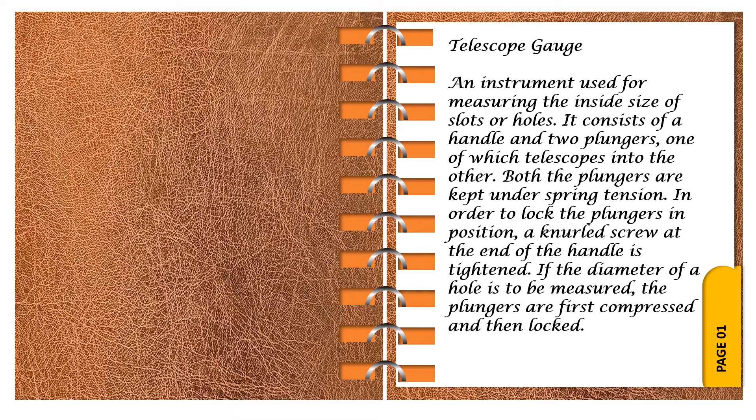If the diameter of a hole is to be measured, the plungers are first compressed and then locked. Measuring technique: compress the fixed and telescopic legs and lock them by the locking screw. Insert the gauge ends into the hole to be measured. Unlock the legs by unscrewing the locking screw for expanding the legs to the inner diameter of the hole.

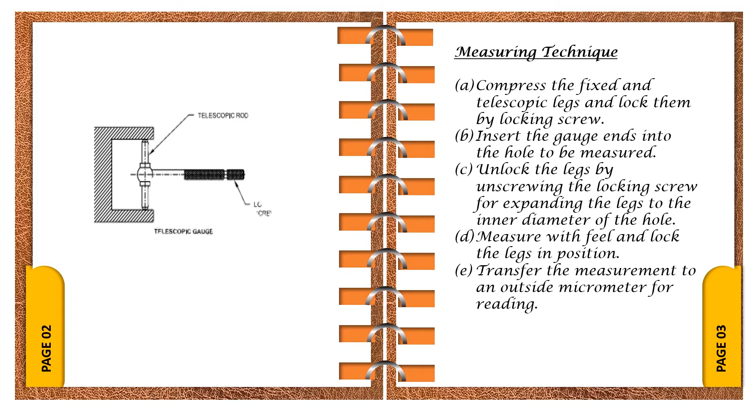Measure with feel and lock the legs in position. Transfer the measurement to an outside micrometer for reading. Dial bore gauge. This is a precision measuring instrument used for measuring the internal dimensions. The dial bore gauge is normally available as a 2-point self-centering type.

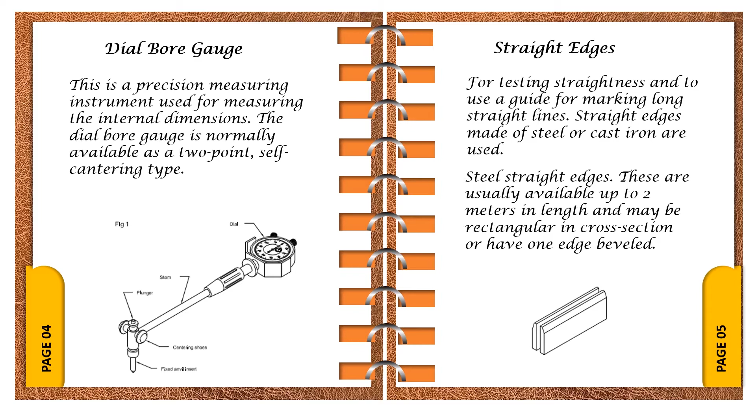Straight edges. For testing straightness and to use as a guide for marking long straight lines, straight edges made of steel or cast iron are used. Steel straight edges. These are usually available up to 2 meters in length and may be rectangular in cross section or have one edge beveled.

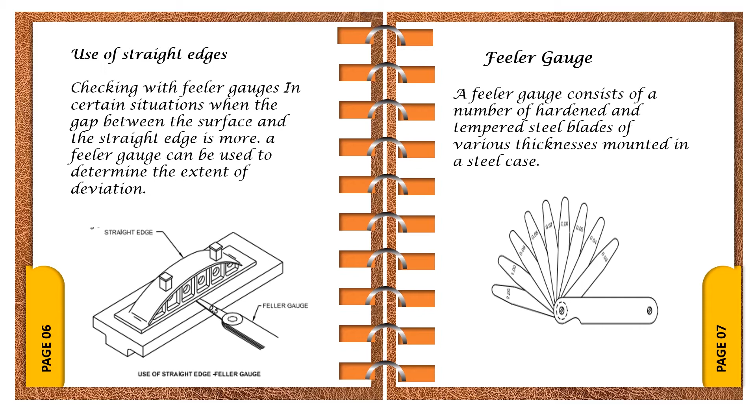Use of straight edges. Checking with feeler gauges. In certain situations, when the gap between the surface and the straight edge is more, a feeler gauge can be used to determine the extent of deviation. Feeler gauge. A feeler gauge consists of a number of hardened and tempered steel blades of various thicknesses mounted in a steel case. Uses of feeler gauges.

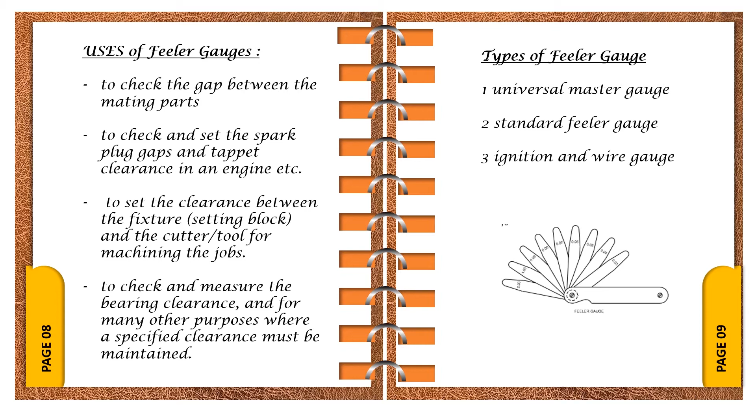To check the gap between the mating parts, to check and set the spark plug gaps and tappet clearance in an engine, etc. To set the clearance between the fixture, setting block and the cutter or tool for machining the jobs, to check and measure the bearing clearance and for many other purposes where a specified clearance must be maintained. Types of feeler gauge: universal master gauge, standard feeler gauge, ignition and wire gauge, screw pitch gauge.

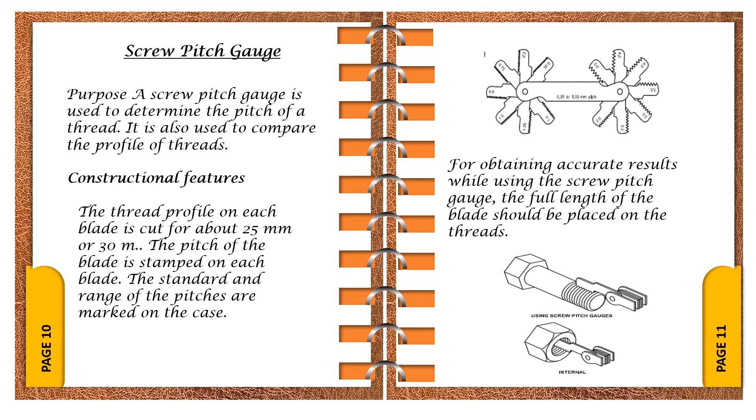Purpose: a screw pitch gauge is used to determine the pitch of a thread. It is also used to compare the profile of threads. Constructional features: the thread profile on each blade is cut for about 25 mm to 30 mm. The pitch of the blade is stamped on each blade. The standard and range of the pitches are marked on the case. For obtaining accurate results while using the screw pitch gauge, the full length of the blade should be placed on the thread.

Vacuum gauge. A vacuum gauge is a useful diagnostic and tune-up tool. It is used to detect vacuum leaks at idle speed, sticking valves, worn rings, clogged exhaust, incorrect timing, and positive crankcase ventilation, PCV. Attaching vacuum gauge. Some manifolds incorporate a plug that may be removed so that a vacuum fitting adapter may be installed.

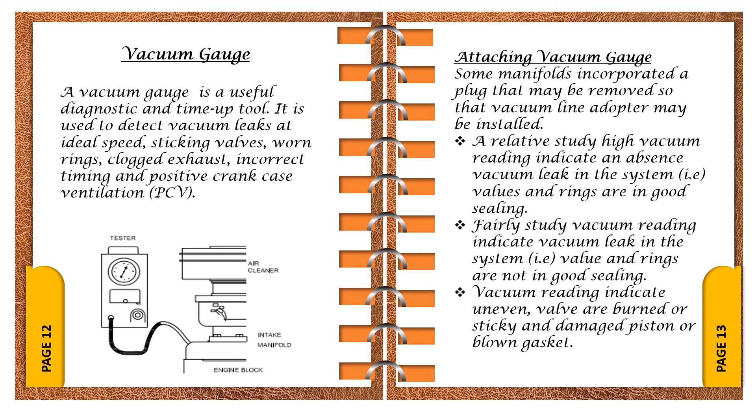A relatively steady high vacuum reading indicates an absence of vacuum leak in the system, for example, valves and rings are in good sealing. A fairly steady low vacuum reading indicates a vacuum leak in the system, i.e. valves and rings are not in good sealing. An uneven vacuum reading indicates valves are burned or sticky, a damaged piston or a blown gasket.

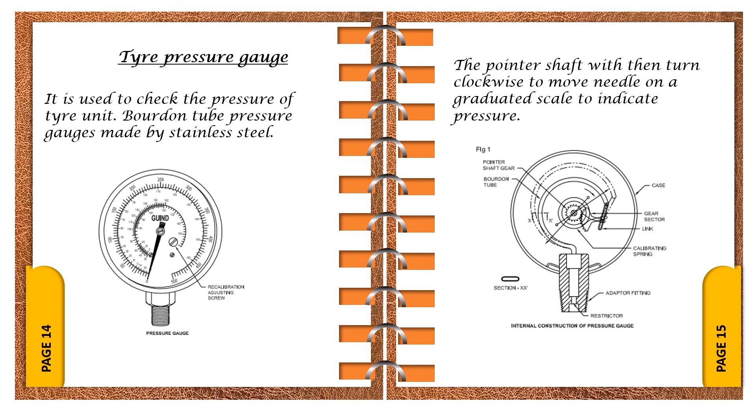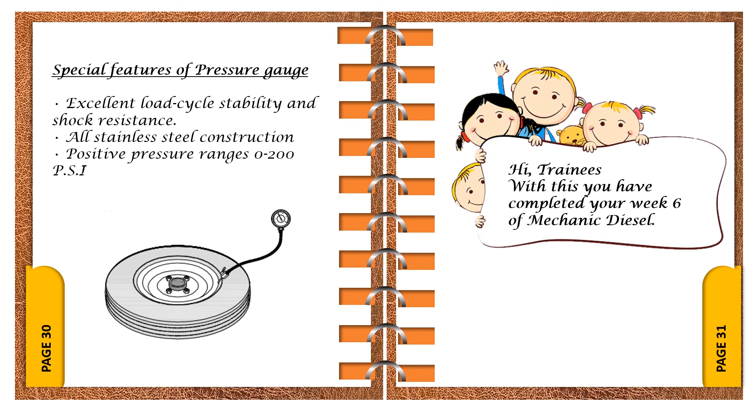With this, you have completed your week 6 of Mechanic Diesel. Thank you.